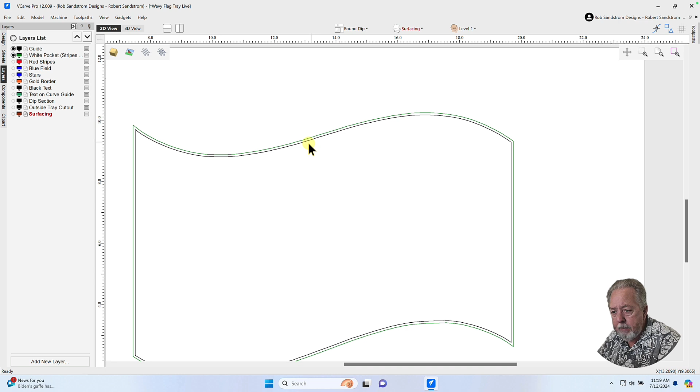And so the stars are white, and then I've got white stripes. So the first pour I'll do is this white. And one thing I'll point out is it's just slightly past the guide layer, about 0.05 inches past the guide layer. I'll show that in a minute. The next layer that I have on here is my red stripes. So I'm going to pour the white epoxy first, and you'll see that when I demonstrate the actual carving in the board and the pouring of the epoxy.

The next layer I'm going to pour after I've got the white hard is my red stripes. You can see those right in this area right here. Each of these are red stripes. I will point out right now a couple overlaps that are obvious. If we look in here, you can see that the red overlaps the guide into the white on the top, on the side it overlaps the guide, and on the bottom it overlaps the guide and goes into the white. And I'm not worried about going a little bit past the white because I'll have a gold border.

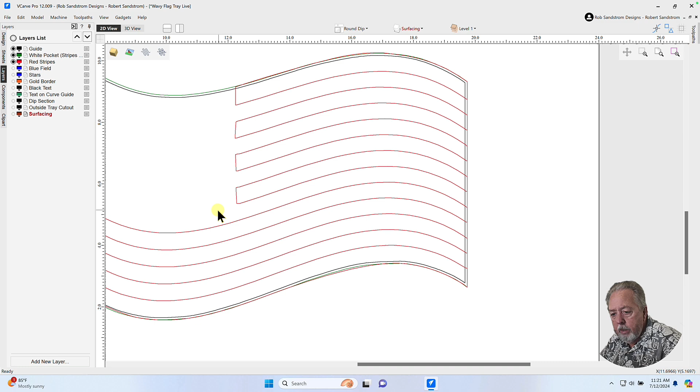You will also see when I put up the blue vectors that it overlaps the blue. And that is so that we have nice crisp lines, and I'll talk more about overlap in a little bit. So I'm looking at overlapping certain colors to allow us to have the exact sizes we want and the look of the design. So in this case, we've got our red stripes, and they're going to be carved directly into white. So as long as I make the red stripes exactly the size that I want them, the white stripes, which are already there by the time I've poured the red, will be exactly where I want them.

The next thing you'll see is the blue field, and that's where the white stars are going to go in. Now, to make sure that the white stars can appear, I actually need two vectors. I need this blue vector here, and I need these stars vectors. And what I'll be doing is a vCarve toolpath between the blue outer field and each of these stars. And because I've already poured the white, these stars will be left proud. And then I will pour in the blue epoxy.

And when I get done with that, I'll have the blue, the red, and the white all in the locations they need to be. And once again, you'll notice this blue, which is a third pour, overlaps the red stripes on this side and overlaps the white on this side, or the guide. And that becomes important for understanding how everything's going to lay out as we go down the process of pouring this project.

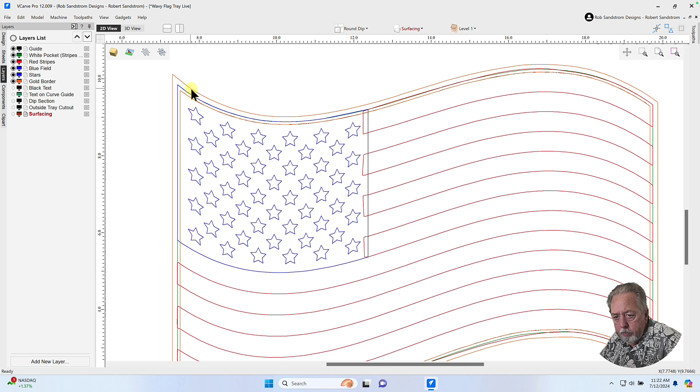The next set of layers that you'll see are the gold border. So if you look here at this gold portion, and you look at this area and this area, let me turn it off again so you can see what I'm talking about. See, the gold, once the blue is hard and the red is hard and the white is hard, you'll see this gold border goes way outside those vectors, and then it comes inside those vectors by about 0.05 or so. I think it's 0.05. We'll measure it in a little bit. And that allows us to make sure that we have a nice crisp line around the flag on the red and the blue here. And it will make sure that everything, when we get said and done, is exactly the size we want it to be.

The next vector you see is the black text. And I'm going to open up two layers here. One is the black text, and the other one is the text on the curve. To get the text on curve guide, I simply duplicated a red stripe vector, and then when I did the curve on the text, you can see I put that above the vector.

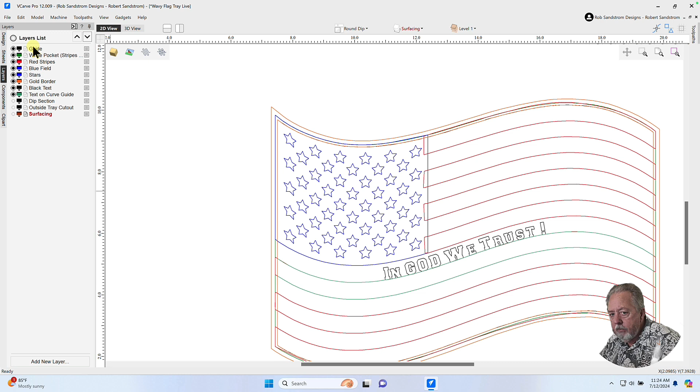Once I have all of the epoxy poured and hardened, then I will go ahead and use this surfacing toolpath. This one doesn't really matter here. That's an artifact. Let me get rid of that right now. And I will surface the epoxy off, and I'll talk about how I do that in a minute. And then once that's all surfaced off, I'll create a pocket toolpath and a roundover toolpath to clear out my dip area. So I've got a little pocket here for a dip. And I'll show you that as we go through it.

And then once I have the pocket and dip in, the next thing I want to do is cut the tray completely out. And once the tray is completely out, then I can go into the finishing process, and that will be after I do this software tool. So all of the physical work I'm going to do after the software. I'm just telling you how I'm setting the software up to cut the board and do this part of the project. So let me turn these vectors back off for a second. So now all the vectors are off.

Let me go through the process of bringing in the actual flag that I used, the vectors or the graphic that I used, and how I went about laying out the layers. I didn't keep that in this file, so I'll go back and grab that and bring it in. And you'll notice that I left this guide here to allow me to come in here and look at something for a second.

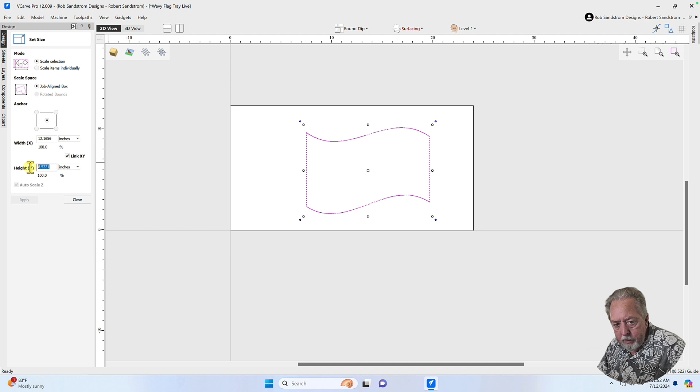I'm going to look at the size of that guide using the resize tool. So I'm going to make a note that the size of that axis is 8.5221. And I will go ahead and copy that, but I made the note in case I lose the copy, and I'm going to hit close. And so for that reason, I can go ahead and turn off this guide now so I don't create any confusion. We'll come back to the layer. Let me turn off the guide.

And the thing I want to do now is import, using the import a bitmap or vectors, the graphic that I used to start this whole project. I had gone to the internet and looked for royalty-free and free wavy flags, and this is one that I picked out to use for my project, and you can see what it is right here.

And I'm going to group this for a second by hitting G, or you could have hit group over here. And I'm going now to center that, and I can do that by hitting the F9 key, function F9, or I could do it by coming over here and clicking here. Now I've centered that in the middle of my project.

If you recall, I wanted my flag to be the width, and we're going to go back over here to the resize tool, and I'd copied it. Let's see if it stayed. Control V, I copied and then I just pasted in what my actual design was that I had decided on before. I copied that in there, left the link XY in place, and now I apply it.

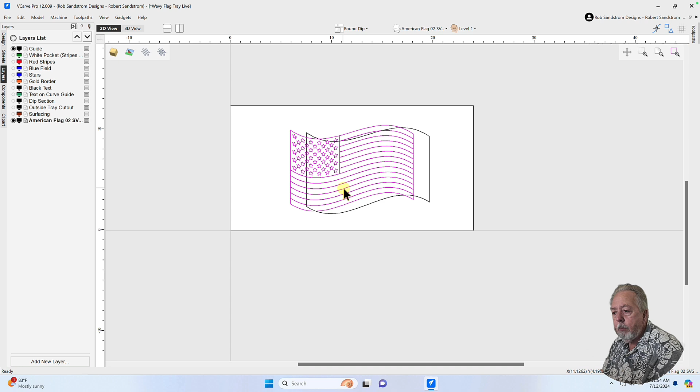So I click on the grouped vectors, hit shift and select the other one that I want to use, go back to design, and then I am going to center that object inside the last vector that I selected. And now you can see it lines up perfectly with the guide. And I'm going to go ahead and take the guide now and turn that off so that I don't create confusion as I start to lay out the vectors.

So now we have those vectors from the American flag graphic that I imported that was a free, royalty-free graphic, and it's sitting in my project. And you can see that it is in its own layer. And if I ungroup it by hitting U, or ungroup back onto original layer, all of those were on the American flag graphic layer. So I'll turn that off and you see they're all gone. So right now there is no conflict with any of the other layers that I created.

So now we're going to go through the process, and this can take a while, of setting up the layers. So the next step is to set up the vectors. And when we set up the vectors, the key thing we have to remember is to make sure that we have the correct amount of overlap so that when we mill the epoxy flag down, we don't have any wood or other artifacts exposed. We want nice crisp lines.

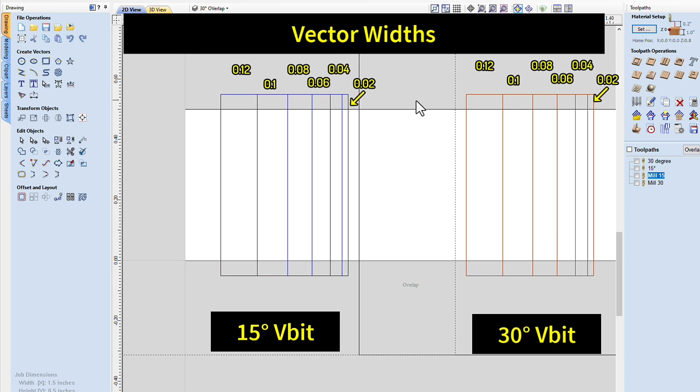And the goal is to show what happens when you use a vCarve toolpath with each of these vectors with no overlap. So I'm going to demonstrate in this little preview what happens when you cut these vectors with no overlap using a 15-degree V-bit and a 30-degree V-bit in the attempt to try and show you why overlap is important. So I've set up, if you look over there on the right, a couple toolpaths, a 30-degree V-bit toolpath, a 15-degree vCarve toolpath, and I've set up a milling toolpath for later when I want to surface this.

And so I'm demoing in this block. If I run the toolpath for the 30-degree and 15-degree bits, what does that look like? And as you can see by this mimic, when you look at the sides there, you see how far it's going down, and the reason they're flat is because we put a 0.125 depth, and we've got a 15-degree V-bit and a 30-degree V-bit, and look at the mountain peaks that are underneath each of those, and you can tell that that is the wood or the underlying material.

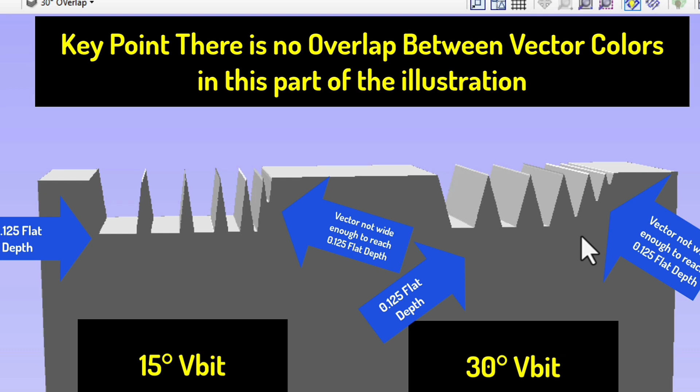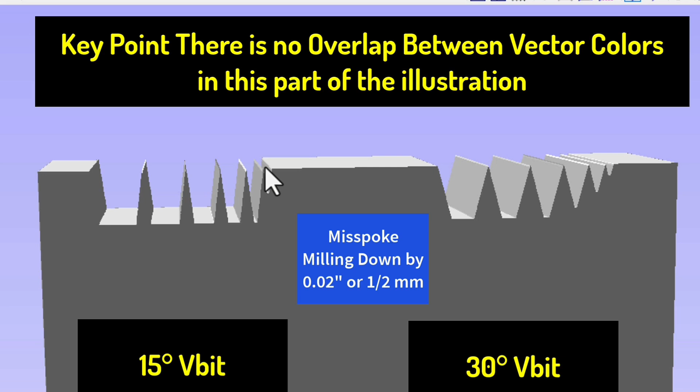So the V-bit cuts with a peak right at the very top of where those two vectors joined because there was no overlap. It is also demonstrating how deep it would go if it doesn't reach the flat depth. So we're going to assume this base material in the mountain peaks is wood for this discussion. And then I'm going to want to demonstrate that when I mill this down by 0.02 inches, not very much, which is a half a mil, what happens to those peaks and how they get exposed so that you don't have crisp lines between the colors of the epoxies you're pouring.

Assume that each of these vCarve toolpaths have a different color of epoxy so that they're supposed to be married right to each other, and look what happens when you mill that down with no overlap. I want you to watch the top. I'm first going to mill down the 30-degree side of the bits, and then I'm going to mill down the 15-degree side of the bits, and then we're going to compare what we see between the colors of epoxy. And I hope this demonstration will make it clear to you why we need to use some amount of overlap. Remember, this has no overlap at this time.

So I need to turn this over to the side here so you can get a better look. But you can see the flat tops, the flat peaks right there on the top that my cursor is pointing to. That's what I'm trying to show you, is that as I milled it down, we exposed the wood mountain peaks underneath, which then does not result in a nice, clean looking picture or epoxy inlay. You can see that it was a little less drastic on the 15-degree, and if I turn this, you have wood peeking through here on the top of the 30-degree, and a little bit of wood peeking through on the 15-degree also, and that will take away from the look of your vCarve.

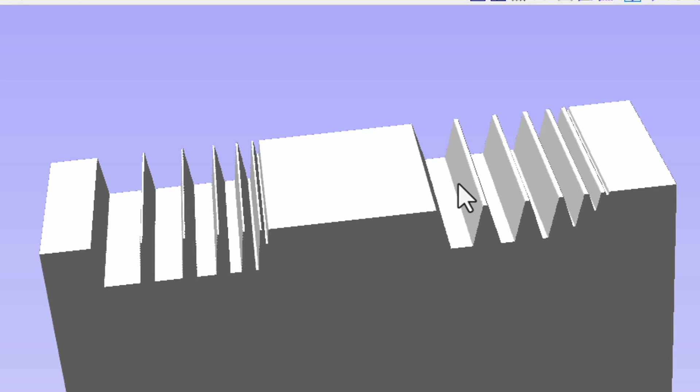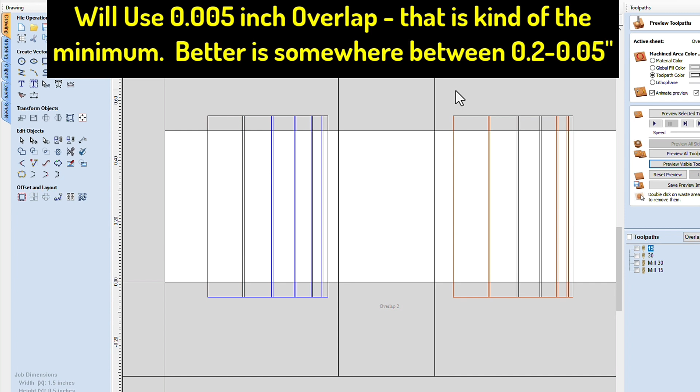So what we need to do is make it so that when we mill this material down, you don't have that wood or underlying material peeking through. And that's what we use overlaps for. So I'm going to set this same project up, but this time I'm going to use a small overlap of 0.005 inches. Normally, Shane recommends somewhere between 0.2 and 0.05. 0.05 is pretty heavy for smaller vectors, but it assumes that you have the best chance of not uncovering some kind of underlying material. So what you see here are the vectors set up in the same sizes, but now we've got an overlap, like I said, of 0.005.

And let's watch what happens when we carve these same vectors with those same V-bit toolpaths we did before. 15-degree on the left, 30-degree on the right. All right, we've got them set up to run. And now we're running those bits. And to get a good picture, I'm going to have to turn this over at a different angle because it's not real obvious what you're looking at.

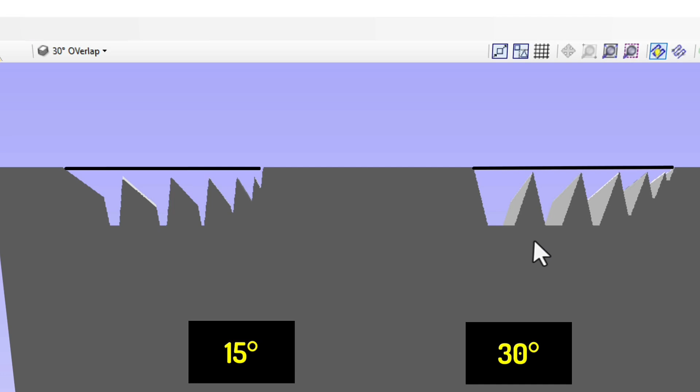But I think you can see that the peaks are below the top of the wood now. So the colors with the vCarve are actually overlapping each other, and whichever color had the last V-bit run on it will be the color that's most predominant on top. But as you start to mill it down, they will come down evenly, and you will have no wood in between.

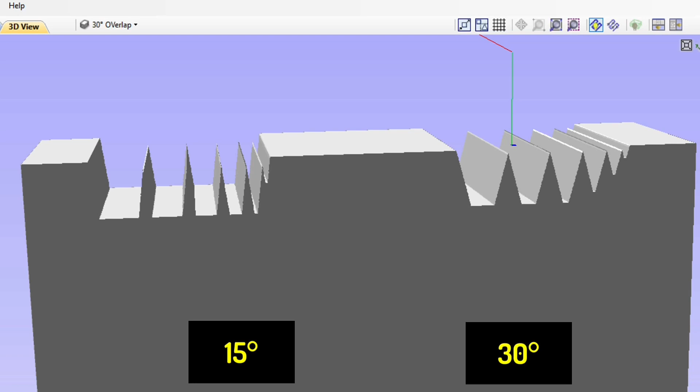You'll have a nice crisp line between the two colors that you poured. And I wished I could show the colors in there so that it would be easier, but I don't have a way to do that. I'm showing there that the wooden peaks are not likely to show through, and now we're going to mill it like we did before. First we'll do the 30-degree bit, and then we'll do the 15-degree bit, and we're going down 0.02 inches once again, which again is a half a millimeter.

Now we're doing the 15-degree, and if we take a look at this, you will see on the 15-degree there is no wood on the top that you can see. The way the V-bit worked, it left no wood. And on the 30-degree, there is a small line. So a 0.005 overlap probably isn't sufficient to ensure that you don't have wood or some underlying color peeking through. And that's why Shane has a bigger minimum overlap to make sure you have nice, crisp interfaces.

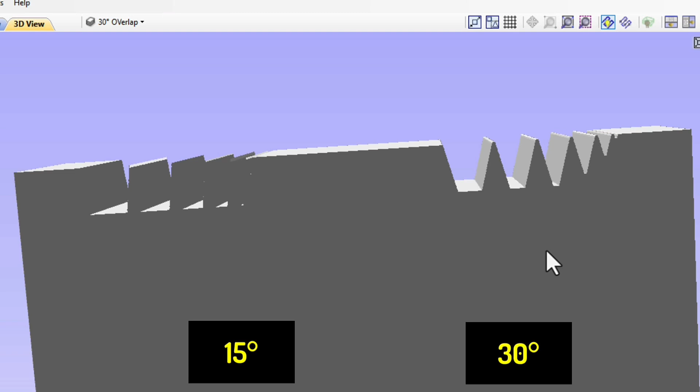I hope this makes it clear why we have overlap. And as you can see, the smaller the bit, less chance of needed overlap. We just finished the video on overlap fundamentals. I hope that gave you a good foundation of why overlap is important, and also why Shane generally recommends, which of course I recommend because he's my mentor, an overlap of about 0.05 if possible. That really removes all doubt with most vectors of having the wood or the underlying colored epoxy peek through as you start to mill your material.

The vector overlap I used in the video just to be able to demonstrate what I'm talking about with a 15-degree and 30-degree V-bit was of course 0.005. And you could see that that wasn't nearly enough for a 30-degree V-bit and may have just barely covered a 15-degree V-bit. We're going to use an overlap typically of around 0.02 to 0.05, and that's what you'll see in the rest of this video. I'm trying to shoot for about 0.05.

There might be some cases where I go down to 0.03, and because I'm making a white pocket pour, that overlap isn't as critical, say, between the red and the white stripes, but it does get critical between the blue field and the red and the gold border that I'm going to put on as we go through the rest of the video. So in the rest of the video, we're going to go into significant detail, and I'm going to show you vector by vector how I lay that out and get the proper overlap.

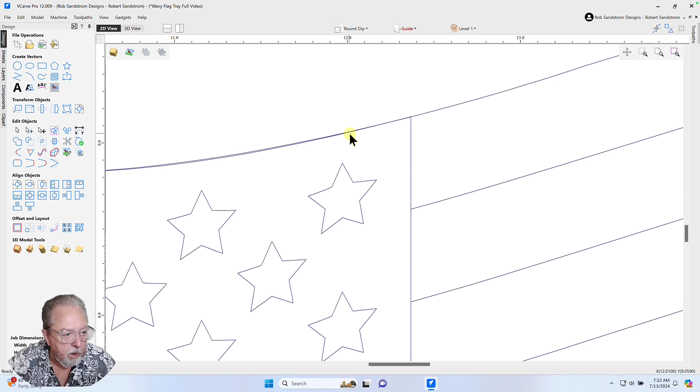So let's start out with the first set of vectors, which I will call the guide, you might recall. So I'm going to come in here, and this one's tricky because we have red stripes and we have white stripes. And so I want to grab the vector that is going around the entire flag and turn that into the guide.

And I think you can see that right here. If you look, this dotted line here goes all the way around the flag. So that is going to be our guide. And so I'm going to know I got all of the various elements of this flag by moving them to the appropriate positions in our layer tree.

And so that I don't mess up my original ones, you're going to see me develop these guides or these layers as demo down below. And then I'll compare the demo ones to what I actually used to cut the project. The first layer that I want to create, I want to add a new layer, and I'm going to call that the guide demo. And that's the way I created this guide layer up here.

So now that I've got the outer layer selected, I'm going to move that layer down to this guide demo layer so that I can keep track of what I've already done. And I'm going to make sure that I turn that off, and you can see that part of the flag moved. And I know that I want the white pocket to be slightly outside of the red stripes. And I'm going to go ahead and use a 0.05 offset for that.

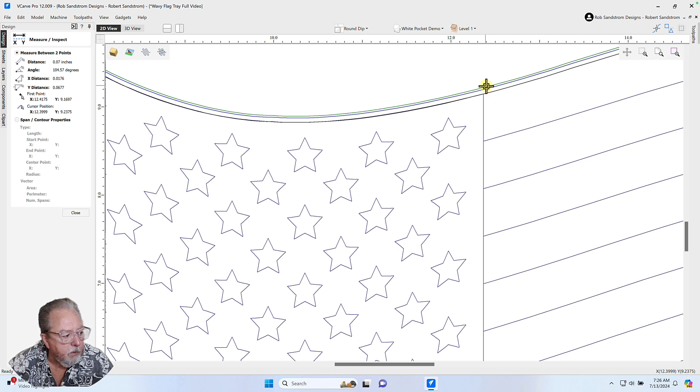Let's see what it says. So originally, it looks like I might have offset that 0.07. And that happens as you go through the design, you start to adjust what you want. And so I think I will go ahead and readjust that. I'll hit Command Z.

And now I'm going to go back over to the layers. I'm going to make sure that's selected. I'm going to go to Design, and I'm going to offset that 0.07 like I did previously. Hit Enter. And now I've taken that, adjusted to 0.07, close, and you can see that the green and blue layer, or the white pocket layers, are right on top of each other. Let me turn off the official white pocket layer that I had from before.

And now we've got our white pocket layer, and we have got our guide, and we've got the rest of the American flag. So the next step on this process is then to move over the red stripes, because you see I have that up here. So we're going to grab the red stripes now. We're going to move those to a new layer. I'm going to add a new layer here called Red Stripes Demo.

And I'm going to make that the active layer. And I'm going to go through here, and I'm going to try to collect the red stripes. And that can be a little tricky. So I'm going to zoom in here. You see I've got that stripe there. And then I'm going to come down here. I'm going to hold the Shift key. I'm going to grab the next stripe.

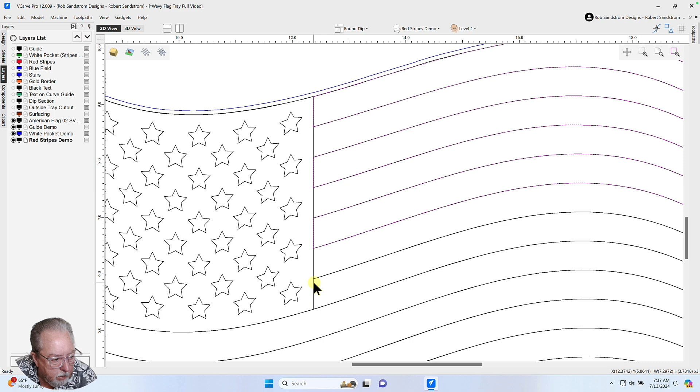So that's red, red. This will be red. This bottom one is red. Skip one. This will be white. This will be red. I grabbed the wrong vector there. So let's see if we can get it. I'm going to move these other ones right now before I lose them. So I'm going to move those to the layer called Red Stripes Demo.

And I'm going to turn that a different color. And when I'm doing it officially, I would turn it red, as you can see up on top here, but I'm going to turn it this color right here, this dark green, so that I know that I already moved those. Okay, and now I'm going to come over here to the next red. Let's go down here and see if I can work my way up.

That's actually the guide. Let me turn off the guide demo. So that's part of what's causing me my trouble. So now let's go to here to red. All right, now it's going to be easier. Hit shift over here and hit shift over here, and that should be the rest of the reds. And I'm going to move those. I right click that, move to layer, Red Stripes Demo. And now they should all be on the Red Stripes Demo.

So what I'm going to do is I'm going to turn off the other layers and the flag. And you can see there's our red stripes. Remember how many we should have? 7. 1, 2, 3, 4, 5, 6, 7. So we've got our red stripes separated out.

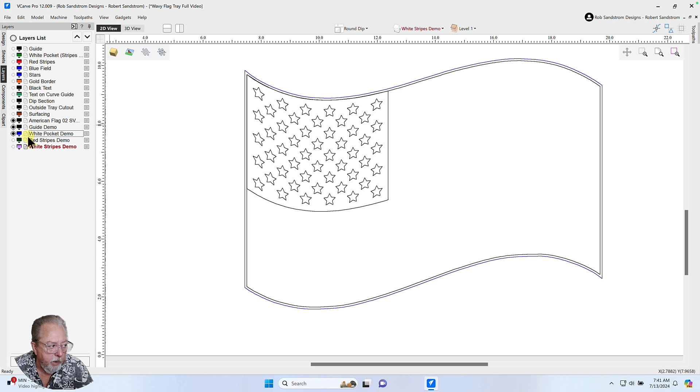I have a white pocket demo because I already decided instead of doing each stripe individually, I'm going to do a pocket first and then carve into that with the red. And I've got the red stripes that I'm going to have to modify with proper overlap. And then I have the white stripes, which I'm not even going to show because I'm not going to use those in the overlap or the process. So let me turn those all off.

And the next step I need to do is I need to set up my blue field because that is going to require some overlap. So I need to have that on a separate layer. So I'm going to grab this field and I'm going to move this to a new layer, and I'm going to call that Blue Field Demo.

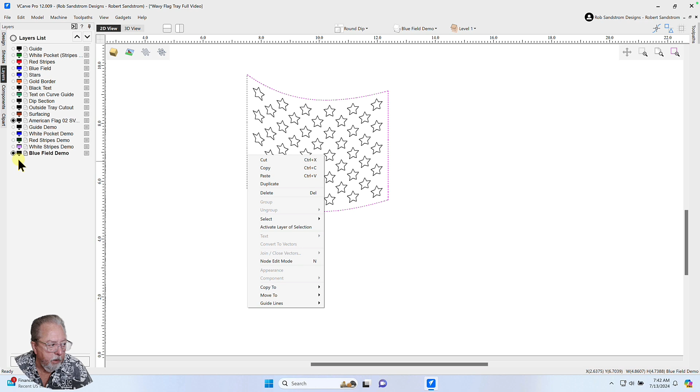Hit OK. And over here I'm going to make that red because I know I didn't use that color for blue. Now you're asking why I make these different colors. Hopefully I explained it well enough. I don't want it to conflict with my final version, because what I'm going to do is as I do these overlaps, I'm going to go back and check against what my original overlap was and how I did.

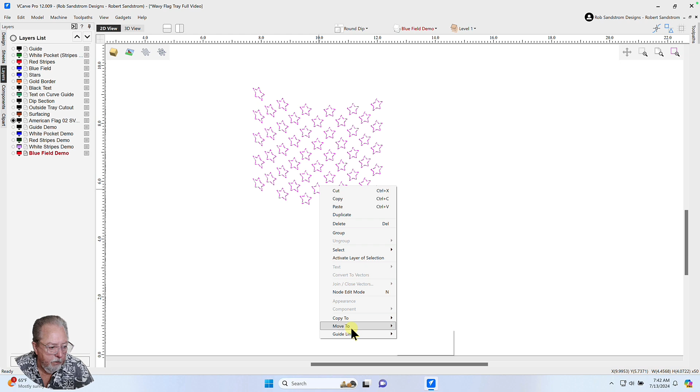So now I have the blue field. The last thing I want to do is take these stars and put them on their own layer, and this will work out when I'm trying to carve the pocket for blue with the vCarve toolpath. We'll demonstrate that later. So I'm going to move these to a new layer, and I'm going to put stars demo, and I'm going to make that color similar to what I did with the blue field demo. I'll make it red. Hit OK.

So now I have all of my, turn that off. I should have all of my American flag, and you can see it's empty, on my various layers. So now I've moved everything there, and I know that my American flag graphic is covered. So the next step is, let's turn these all on for a second. If I look at it, you can see that's how the flag is laid out in layers. And remember, I do my work by color layers. The first one was white. We're going to pour the pocket in there, and I know I repeat myself sometimes, but I'm trying to bring things around and make it clear in my teaching style.

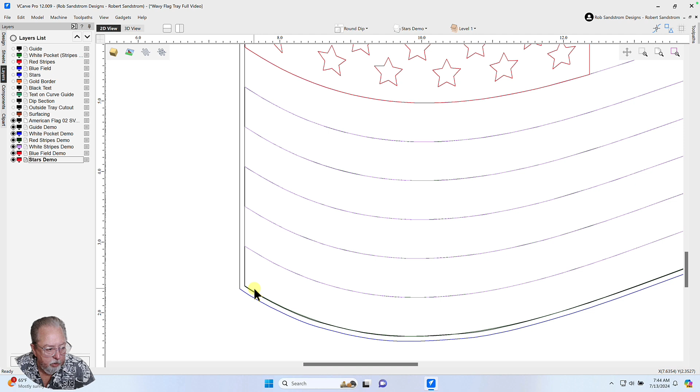The next thing I need to do is either do the red or the blue, however I want. But before I do that, I'm going to do gold. I'm going to have a gold border, and that gold border is going to go around the outside of the white, so it takes care of the white, and it's going to come inside to the guide area or so to make sure that I overlap the red that's going to be poured. And I'm going to bring the red top and the red bottom all the way up past the guide so that we have a nice border around it. It'll become clear as we go about doing that.

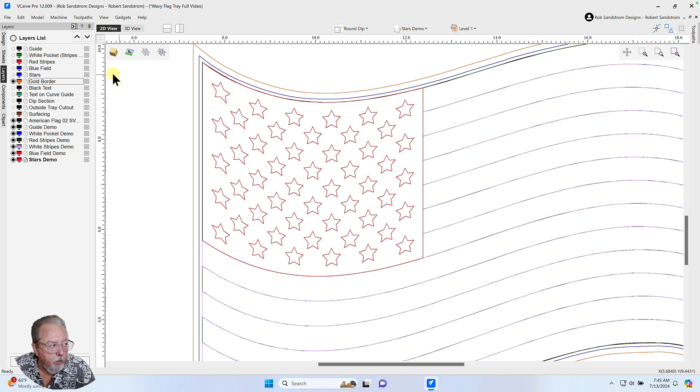In fact, let me show you where the gold border is right now as I already designed it. So let me turn on the gold border real quick. And I think you can see that the gold border comes up. And if we look at the distance, let's take a distance, and I go from the guide that we already have, you can see that the gold border is about 0.25 inches from the guide. And if you look at it from the white that we established, it's about 0.1299. So it's a big overlap, and that's okay, because in the end, what we want is a nice gold border that's about 1/4 inch or so thick around the whole flag.

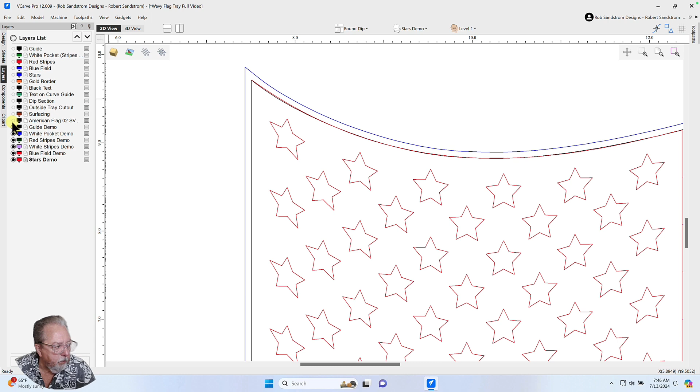Again, I'll show you that. Let's go over here where it might be a little easier, come across, and you can see the border is 0.2038 inches wide, and that's how big it'll be when we carve it. That allows us to have it plenty wide enough to get an 1/8 inch clearance bit in there. So let me turn off the gold border again, and let me come over to the layers. I'm going to turn off the gold border, and I'm going to turn off the American flag. I'm going to leave the guide demo on.

And now we're going to set up our gold border. So on our gold border, let's see here. I think I wanted this to be about 0.25, 0.20. It doesn't matter if I match it exactly from my original design, but here's what I'm going to do. I'm going to make a new layer, and I'm going to call it Gold Border Demo.

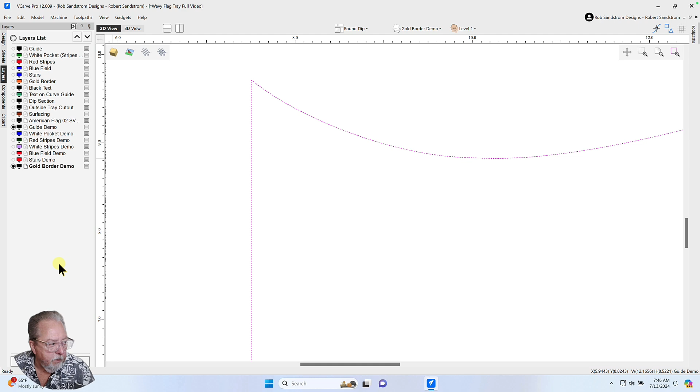Okay, first thing I'm going to do is offset that out 0.2 inches, I think. So I'm going to come down here, offset, outwards, 0.2, roughly. Create sharp corners because we have the sharp corners there. Hit offset, and now that's my new gold border. Let me validate that I had that on the active layer, gold border demo.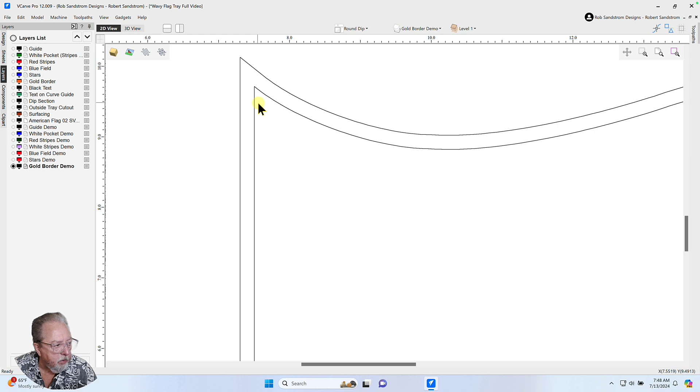Let me turn on the other gold border, and you can see it rides right over the top of that. Turn that off. And then the other thing I need to do is close this. I need to take the demo piece, and I need to copy, not move, copy that to gold border demo. And we come back down here to layers, and I'll turn off the guide, and you can see this is the gold border. Let's turn the gold border this rust color, and let's lay the final gold border on that to make sure I set that up like I did before. There you see it rides right on top.

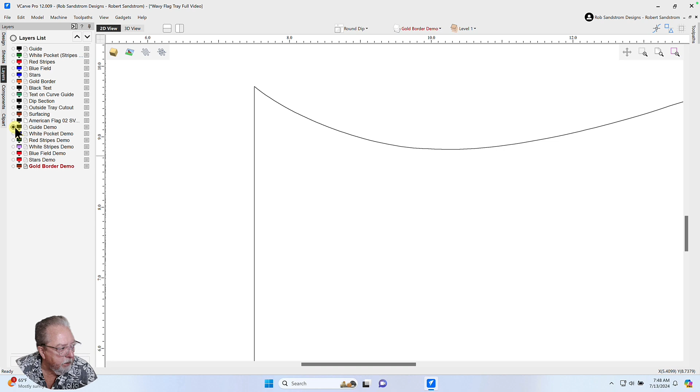So now what we have is our gold border around there. So we turn on the key pieces. Let's turn on the guide. Let's turn on the white. And let's turn on the gold. What you can see is the gold border is going to bound the white. So anything within the gold border, that's going to be the last cut we do. And it's going to come through and clear out any overlaps that we have.

So the next step is to overlap the various areas that we want to overlap. So let's go ahead and start with the blue field. How about we start there? So there's the blue field. And we know that we're going to need this field to overlap into above this guide, which is where the gold's going to cut. So we need it to go above the gold border here and no higher than the white, but the white really isn't that important. Just as long as it goes sufficiently high above the gold border, we'll be okay.

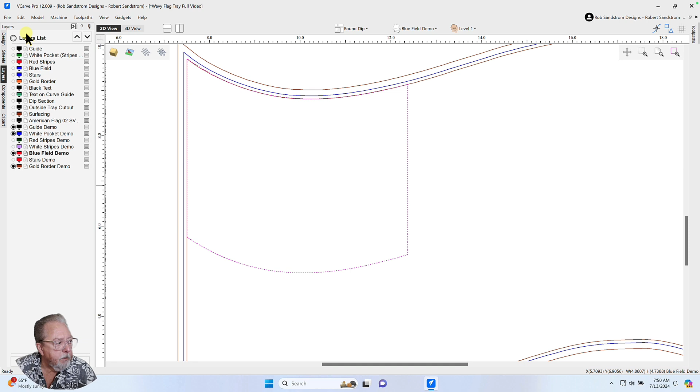We also know, to keep the flag proportions correct, that we need to keep this right edge and this bottom edge the same. So the only areas we need to move are those that are going into the border. So that's our next step, we're going to go ahead and move that. And to do that, I'm going to make sure that I've got the blue field demo located correctly. So that's my default. And then I'm going to go to the design. I'm going to hit N for node mode.

And this is where things start to get a little tricky, because you're pulling these nodes. And our goal is we're going to pull this side of the flag out so that it's to the white area, I'll call it, to the white border, right close to it. It can be a little shy, a little out, it doesn't matter, but we want it that far to get the nice overlap with the gold border inside.

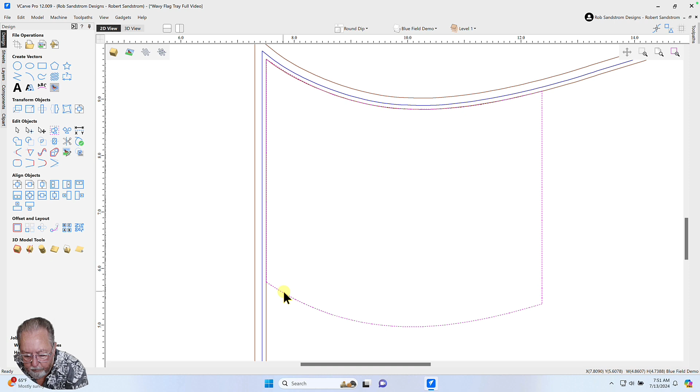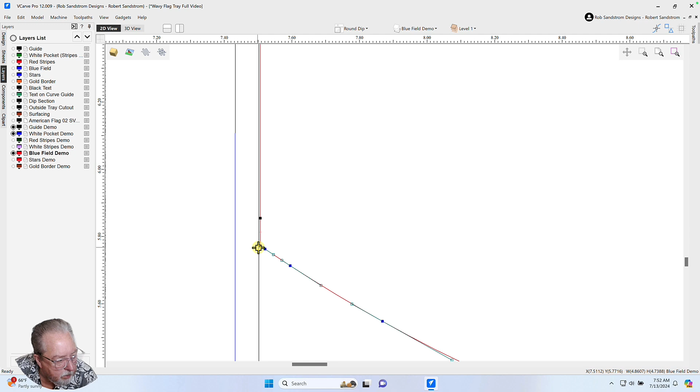And I'm going to turn off the gold border, because it will want to get in the way sometimes, and we don't need it, because we know we just need to go out to the white. So now I'm going to go ahead and hit delete there. And so I'm just going through right now and taking out the ones that I know may create issues for me. So D there, D there. I'm going to insert one. I'm going to insert a vector, say right here, since I probably shouldn't have deleted the other one. And you ask me why? Well, because this is going to be my anchor. I don't want this to move, because this has the shape of the stripe below it.

So now what I'm going to do is I'm going to take this vector and I'm going to move it out just close to the white. If it's on the white, that's fine. At the white, that's okay too. Just shy of the white, that's okay too. Either one will work. Now I'm going to go up to this other vector, and I want this vector to be up in the corner.

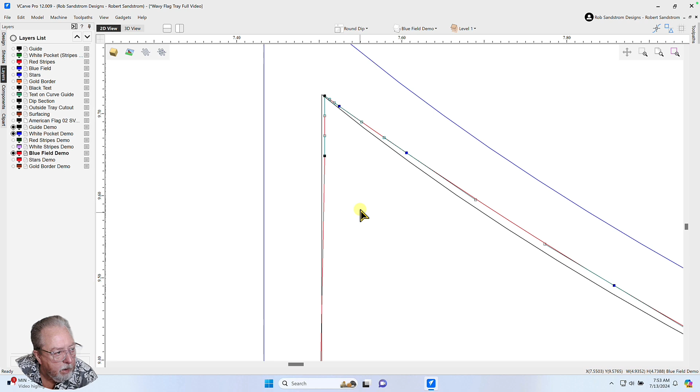So I'm going to make sure I'm grabbing the right one. Yep, I'm grabbing the right one. This is the guide, this is the vector. I'm going to pull this way up here. And I'm going to take this one here, and I'm going to pull this up here. See, I'm just shy of the white, right at the white.

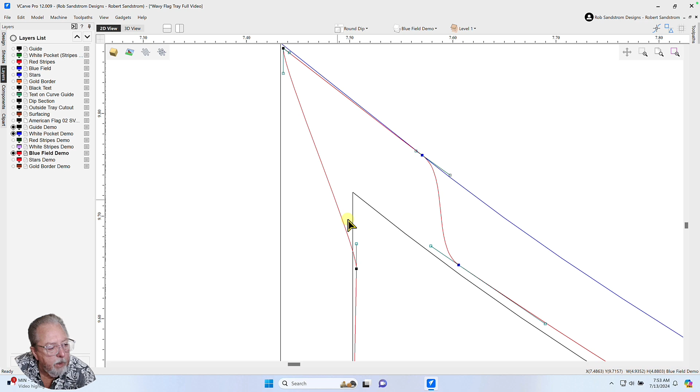And then I can come over here now, and this is extra. I can delete that one, and you can see that gives me a nice straight line down there. And then what I want to do is come over to this other corner. So I'm going to go to each corner first.

And on this corner, I want to make sure this is anchored, because I don't want this to move, because this is the regulation size of the flag for the vector. So I want to take this one next to it, and I want it to move, and I want to make sure from this point down, everything is nice and straight.

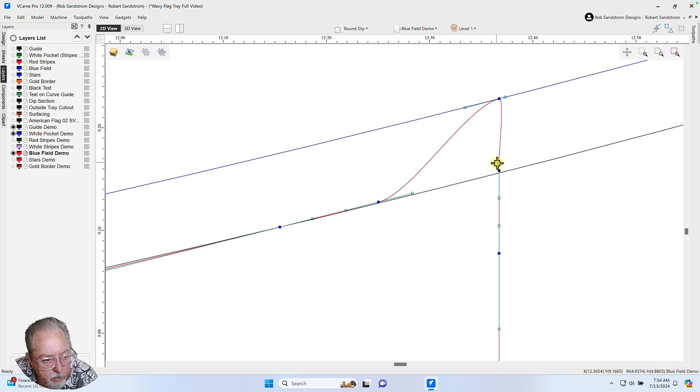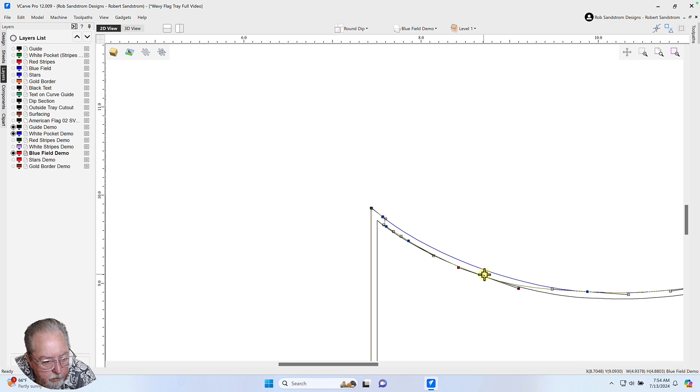So now I can take some of these vectors in the middle and move these up. I'm going to move this one to here, this one to here. These two I'm going to go ahead and just delete. And I'm going to move this one here, and I'm going to move this one here, and I'm going to delete this one.

After deleting that last vector, let's go in here and see what we got. Hit node again. So that's my blue. Let me turn off my guide and my white pocket and just look at my blue. That looks good. Let's turn on the white pocket. And you can see it comes right along the white pocket. So I like the way that works. And we never changed the right side or the left side.

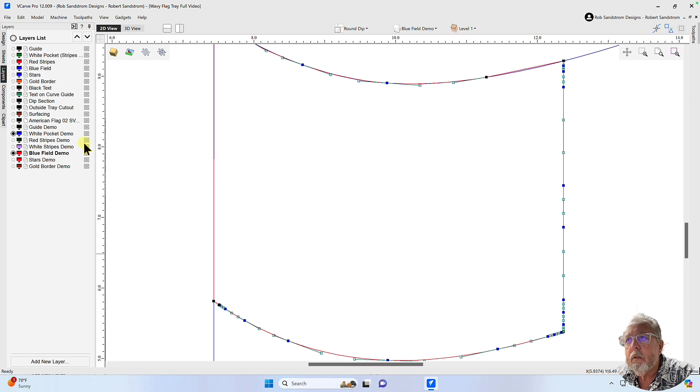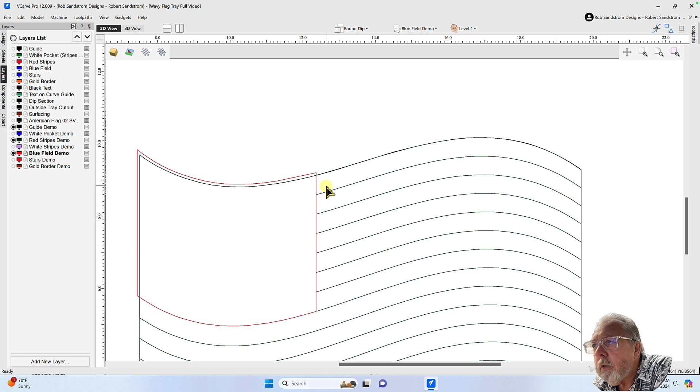So now the next step, let me turn the guide back on for just a second, is to switch over to the red stripes. So when I turn on the red stripes, let me turn off the white pocket right now. What you can see when we're looking at the red stripes is we want each of these red stripes to stay the same width. If we're measuring the distance on a red stripe from there to there, we don't want that to change.

Since we are engraving into the white, we know they won't change anywhere where we're engraving into the white. But where we need to go out into the gold border up here, and on the left side and the right side, those stripes are going to need to go past the guideline and towards the white. Let's turn on the white. So they have to go out to the white area past the guide, because when you turn on the gold, the red stops at the gold, so there'll be overlap issues.

So you want to take these red stripes and move them into the area of the gold, and you want to take these red stripes and move them into the area of the blue field. So on the right side and left side, each of the stripes need to move. On the bottom, they need to move down, nothing in the middle, and then on the top, it needs to move up. And that's what you're going to see me doing now.

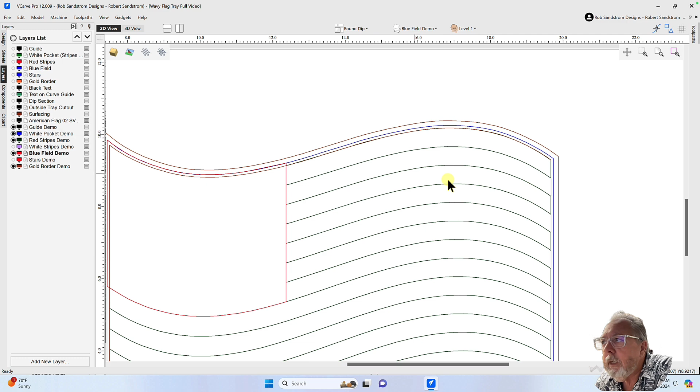Again, it's a long process, node by node, but as I pull the red stripe up in the top, I'm watching it as it comes up. And I can't just do a rampant pull, because of the curved angle. If this was straight, not a wavy flag, I could just grab all of these and move them out.

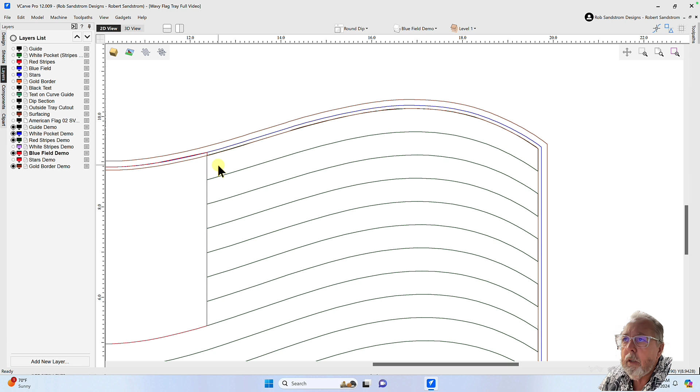But I can't do that because I've got to maintain this angle right here, or the stripe won't look right. So I have to maintain these angles here and on the edges wherever they're going to be cut off. Hopefully that'll become clear as we go through the node editing process.

So let's start now. I don't need the guide, because I can use the white as the thing to look at. I don't need the gold, because I know that if I'm up towards the white, I'm not in the gold. All I need is, for the first set, I'll go ahead and do along the blue field. So I'll leave the blue field up for now.

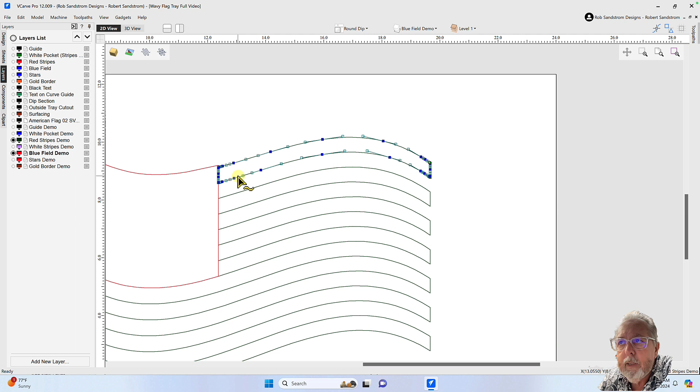And I don't need the white pocket right now for the field, for the red stripes going into the field. And I'm going to do it this way right now so that I have as few vectors as possible that I can interact with. And so we're going to go to the node mode. I'm going to grab this red vector. I'm going to go to the node mode by hitting N, or I can actually, well, let me put the stars up too, because I want to watch how far I'm moving them in.

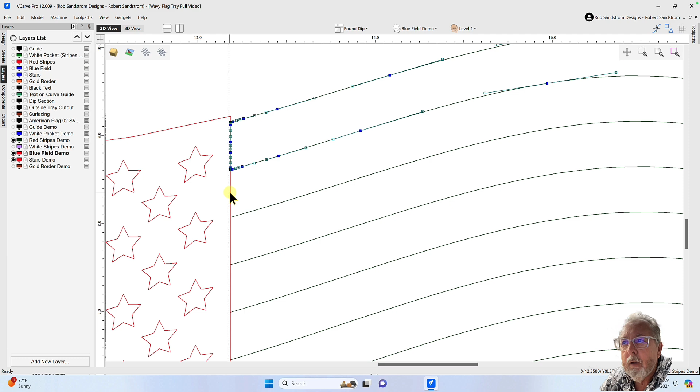And for me, I can do this a number of different ways, but I know if I go in here at least 0.05 to 0.03, somewhere in that area, I'm going to be okay. And since it's just straight up and down, I'm going to use another guide. I'm going to come out here, line this guide up right on that blue union. Remember, that's the blue union right there.

I'm going to create a relative guide, relative, and I'm going to come in negative 0.05. And I know that gives me plenty of room, and I don't have to come in that far, but at least I know that'll give me a guide. So I'm going to create a new guide. I'm going to get rid of this guide right here. And so I know if I come in at least that far, I'm in good shape. So that's what I'm going to do. I'm going to come in that far, and I'm going to start moving these.

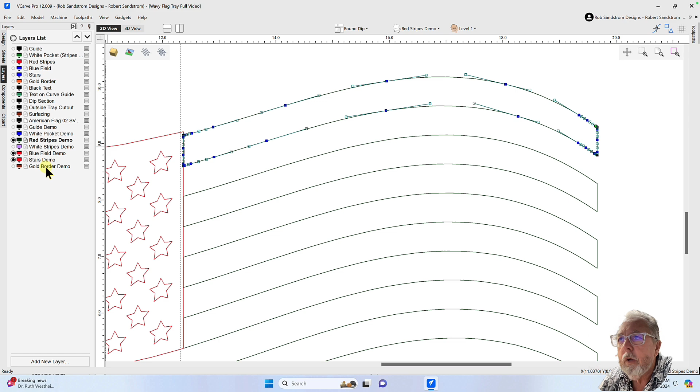So we're going to hit N for node mode, or you could select it with the effector. And I want to make sure, this is where we can get messed up, I'm not in the blue field demo. I want to make sure that my active layer is the red stripes, because I want them to stay on the red stripes when I move everything. All right. So I'm going to work just around the blue union at this time. I'm going to use these corners as anchors.

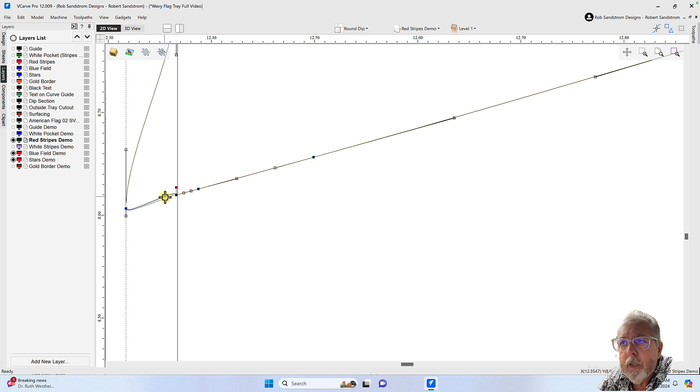So I'm going to take this node right here, and I'm going to pull it out over into this area. That's 0.05, and I know that will be fine. And I'm going to take this other Bezier curve node, and I want to make sure that that is as straight as possible right here as it goes over. So I've got that coming in, and I want to maintain that shape. So I'm going to move it up just a little more. It's all by eye. Make sure it's nice and straight coming in. And I'm going to move this up a little bit. All right, that looks pretty good. This, I'll go ahead and bring that way in.

Now I'll go up to the other corner. Remember, I told you I work with the corners first. I'm going to take this one right here. I'm going to move it out. Move this Bezier here. Move this one down a little bit now. Turn the Bezier over there a little bit. Turn the Bezier there. And now that's got a nice, good, straight ramp.

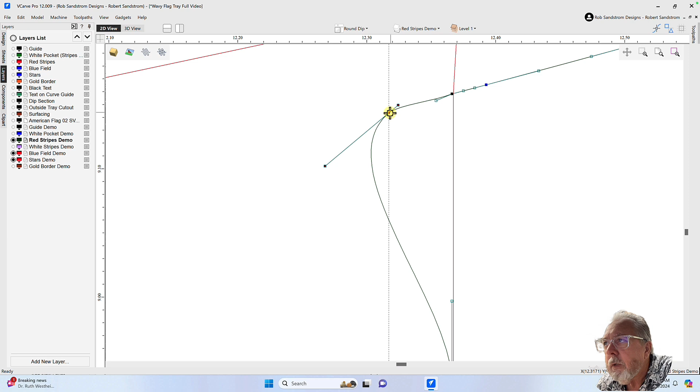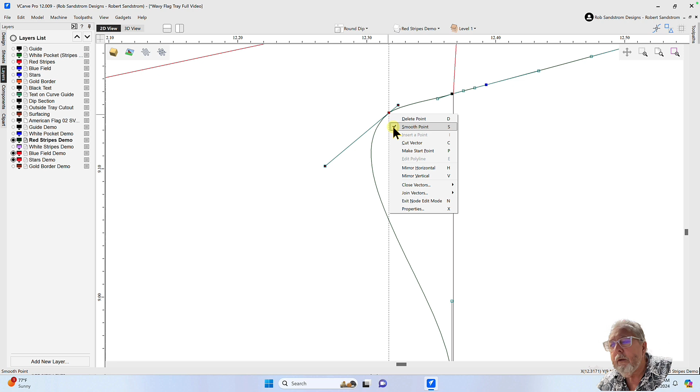Now, if I had my druthers, normally I should be able to click this off, and that should become just not a smooth node, but for some reason that's not working for me on my Mac. I don't know if it's a bug with version 12 or if it's a problem with my Mac. Most times you should be able to just click on this, right click it, and if you unclick the smooth, it should become a regular point. It's not working that way for me, but you can try that if you like. I'm just going to move on because I'm going to deal with what I got for right now.

So we're in the node mode, and the next thing I'm going to do is take this node and delete it. I'm going to take this node and delete it. And now you can see it just goes straight down. So we've got one of our red stripes done. And now I'm going to do each one the same way, and I'll go ahead and speed this up. But you've got the idea. I'm leaving an anchor node, moving it out. Then I'm deleting inside. So let me go ahead and do that, but I'm going to speed this up when I actually show this in the video.

So now you can see that I've got all of the stripes that are going to overlap with the blue union overlapped on the left side. And I'm going to turn off the blue field now. The next step is take all these stripes and bring them over the edge into the gold border. So let me turn on what I'm talking about here.

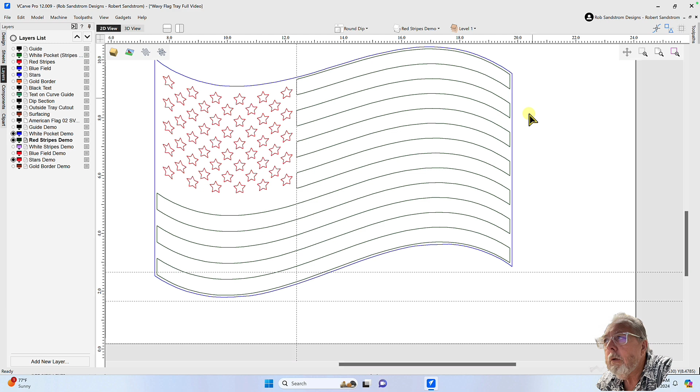I'm going to turn on the guide or the white pocket, either one, and I'm going to pull them out towards that white pocket. And if I get out there, then I know I have plenty of room when I turn on the gold border. As you can see, the gold border will be where these are stopping right now. So now we're going to go through that.

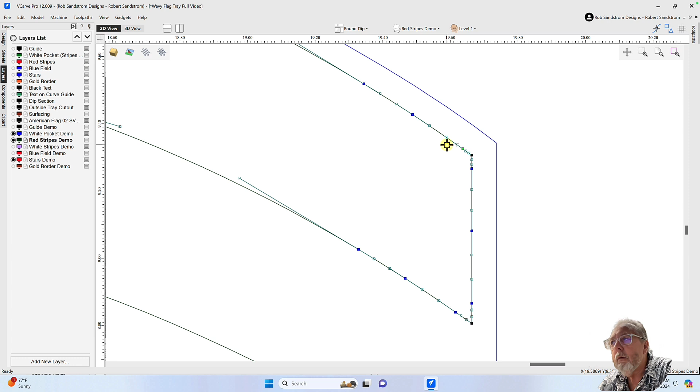And once again, I'm going to use the corners always as an anchor point. I'll demo the first one. So I've turned on the nodes. I leave this as the anchor point because that's where the gold is going to come down, and that's where you're going to see the interface between the gold and the red stripe. And I'm going to pull this one out. Going to make sure that that angle stays pretty good.

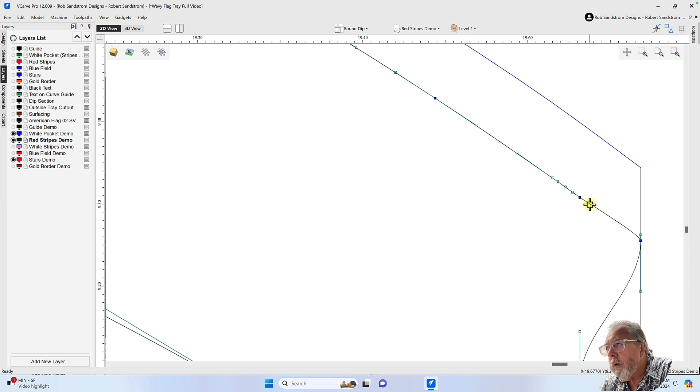And when you're doing yours on your Windows computer, if it allows you to turn this one into a non-smooth mode, that would be even better. But for some reason on my Mac, when I try to turn it off, it doesn't work. So now we're going here. Remember, I'm not grabbing. This is my anchor point. This is the one that stays on the guide.

And I turned off the guide because I don't want to accidentally mess with those nodes. So I bring that down here. Keep that angle pretty good. This is good. You won't see this because the gold is going to go inside here. Then I'm going to go around and delete that one. And so that's what you're going to see me do now.

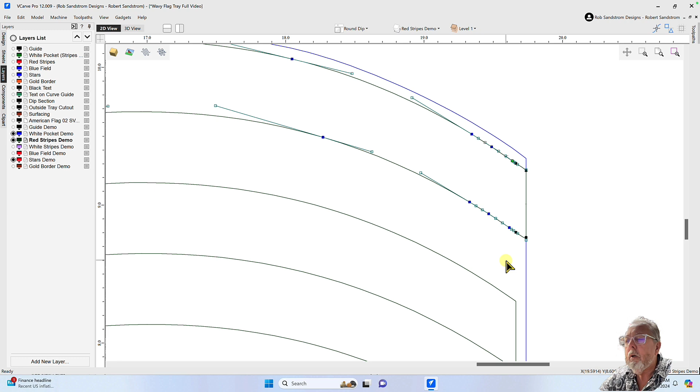I'm going to speed up the screen, but I'm going to go through the process of moving all of these vectors so you can see how I'm doing it, but it will be sped up considerably. So here we go.

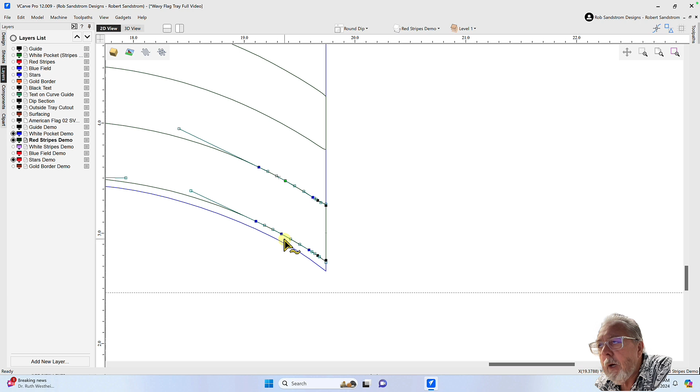So now, because this is a bottom stripe, I need to also come down into the bottom here, and I'll have to come back up and fix the top up here and do the same thing. But I'm going to show you right now how I'm moving the bottom down, and it's the same thing I did with the blue field, because the gold's going to come over the edge, but I'm not going to move the rest of any of these other stripes. And I just want to demonstrate that now.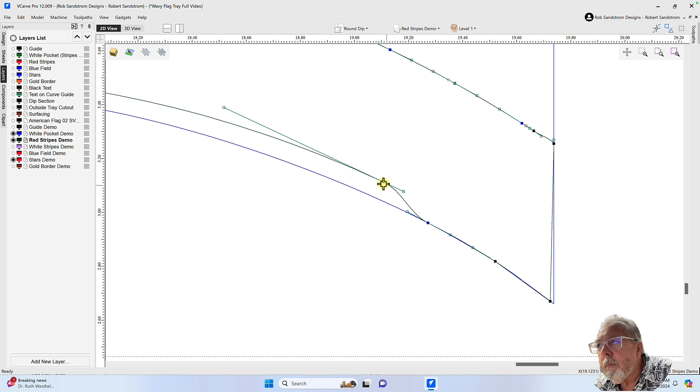And so I'm going to take this one here, and I'm going to move it down into this corner, and I'm going to delete this one. I'm going to move this down. This down. Again, I'm not trying to get right on the white. If I'm a little shy of the white, that's okay. It's not that critical.

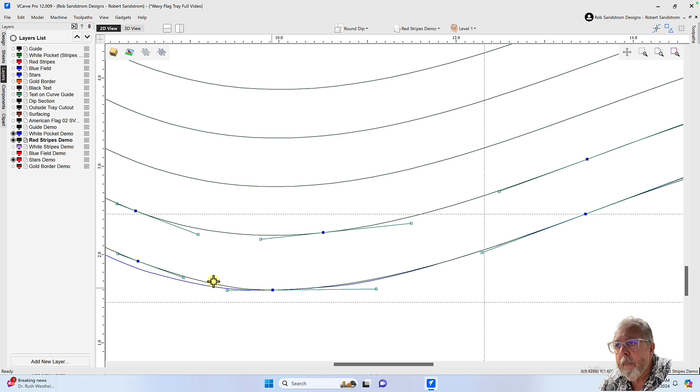I keep accidentally grabbing the handle versus the node. So let's get the node. There we go. Delete that node.

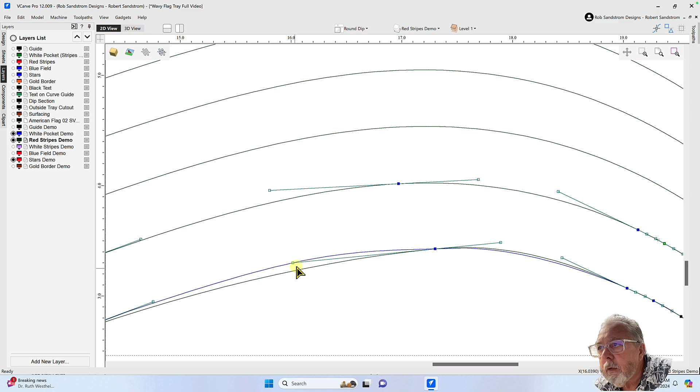All right, so let me take a quick look down here at the bottom. I just got to be close. It doesn't have to be perfect. As I said, as long as I'm somewhat within the white area there. All right, that looks good. And now we do the same thing on this side. Put up the anchors.

All right, now we've gone through and adjusted the bottom and the right. Let's take a quick look at where the gold is. So the gold, as you can see, bounds those areas. So now we need to finish up the left side and the top. So we need to finish the top of this red stripe and the left sides of these red stripes. So let's go and fast forward again.

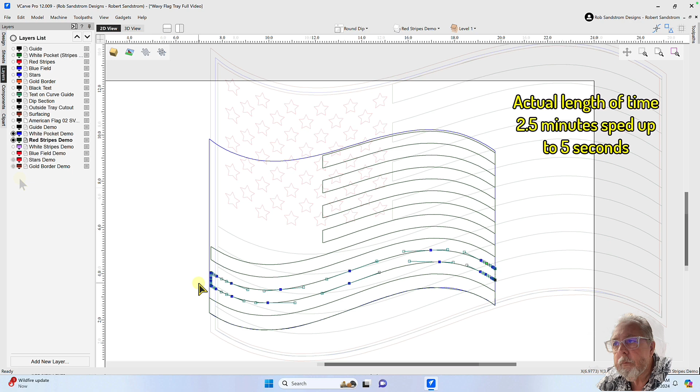Okay, at this point, we've got the full left side, we've got the bottom, we've got the full right side. The only thing we need to do now is pull up the red stripe on the top where the gold border will come down. Let me put the gold border on again. So you can see it's right on the edge. So now we pull this one up like we did the others.

Pull that one straight up. So now we've got the top of the stripe pulled up. Let's go ahead and put the gold border, just do a quick check. So when we do a quick check, we can see that the stripes are all within the gold border. So it'll be bounded. Now let's put up the blue field.

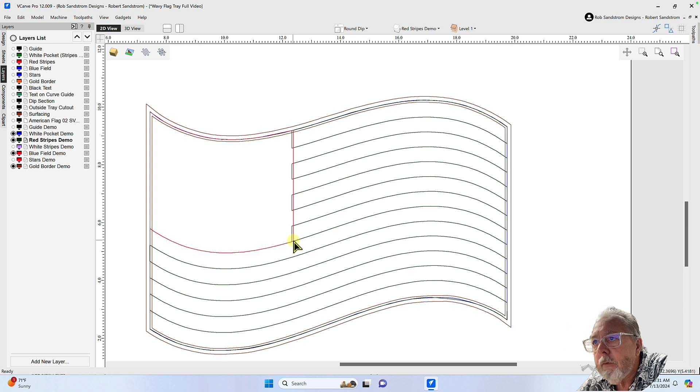We can see that the blue field, which will be the last thing I carve and pour, bounds the stripes here on the left side. And this is not a red stripe, this is a white stripe, so you're going right into the white epoxy, so no worries about overlap there. And we can see that the blue field overlaps the gold border and all the stripes overlap the gold border. And remember, there are really no white stripes because those are the first pour we're going to do.

So now when we look, if we turn on everything, we've got all of the overlaps perfectly assigned where we need them to be. And because of that, we can now start to lay out the tool path. So this is the most complicated part of the whole process of setting up your multi-layer epoxy for pouring. And let's do a quick review.

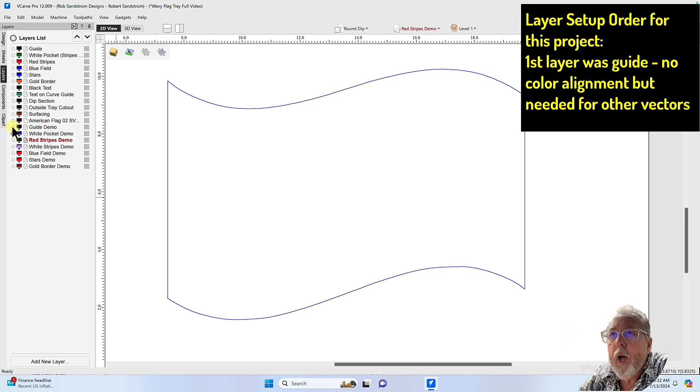The first thing I did was I took the original graphic and broke it into the vectors by the pours that I was going to make. And you'll see when I set up my tool path, that's the philosophy I'm using. The first one that I set up was the guide, and then I could work everything off of that. And once I had the guide set up, I set up the white pocket, which went 0.05 past the guide. Then after I had the guide set up, I set up the red stripes, and before I started worrying about overlap, I just got them onto their own vectors.

Then I took the white stripes from the graphic and put it on another layer, which I'm not going to use in this demo, but I'm going to keep it for later projects. And then I did the blue field. And on the blue field, I made it so that it would overlap into the top and on the left, but not on the bottom because it was right at the right size for the red stripe alignment. And remember, this is a white epoxy pour that will not be cut into other than for the blue and the red stripes. And then I set up the vectors for the stars,

and I also set up the gold border. And when I set up the gold border, I set it up off the guide so that at the end, this will be the last pour, and it will cut into the tops of the red, the tops of the blue, the left of the blue, the left of the red, the bottom of the red stripe, and the right of the red stripe. And it will perfectly bound everything and keep all the red stripes at the right size and the blue field at the right size. And we will have what we want.

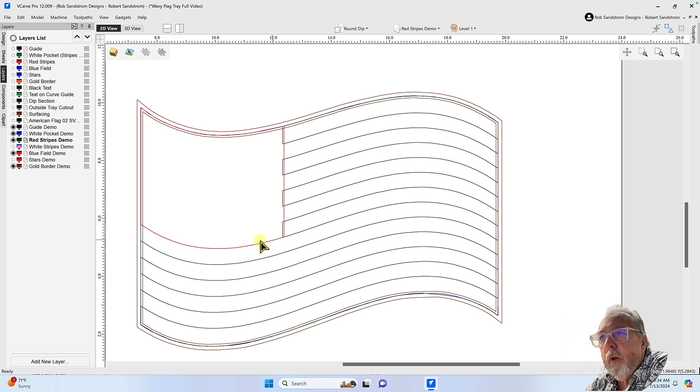I went back and I made sure that I turned on the blue field. I made sure that my blue field was overlapping here. And the stars really don't have any need for overlap because they're going to be left when I carve the blue field. They were poured white in the first pour, and they'll be left when I pour the blue field and I carve the blue field.

Now that we've gone through all the vector layers set up for the flag proper, the next thing to talk about is I had decided to add some text "In God We Trust" to my flag. And I want to show you how I did that simply using the Text on Curve tool. The next set of vectors I'm going to set up is the text. So I'm going to add a new layer, and that one's going to be Text Demo.

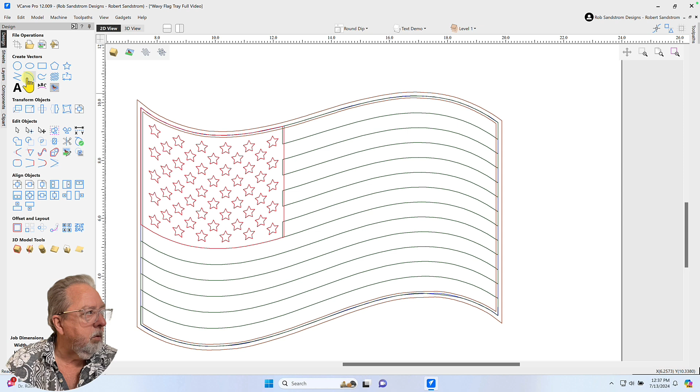And then I'm going to add one more new layer because I like to keep it simple. Text on Curve. Let me add Demo there. So now I've got two new layers, and I'm going to set up the text. So the text, I'm going to make that the highlight layer. I'm going to go to the text tool, and let me just put it up here on top right now. In God We Trust.

And I used the freshman font. I think I need to separate out these a little bit to make the epoxy. I'm not sure I did a good enough job there to my full satisfaction, but let's go ahead and separate in between. So I'm going to see if I can explode up here. If I get in between and I were to left click, those would go together. You can tell by the little symbol there showing them moving closer together.

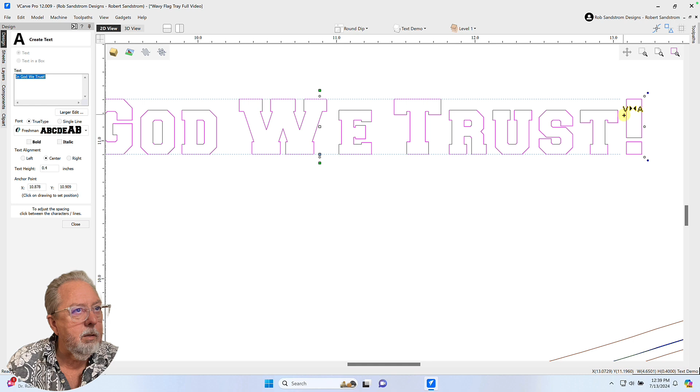Hit the shift key, then they move out. If I just hit it without the shift key, then they stay close. Just putting a little spacing between them. And I could have done the whole line at one time. Sometimes it's easier for me just to go through step by step. I'm holding the shift key as I select these. And if I didn't hold the shift key, then they would move together.

So I'm going to hit close. And if I need to, I'll adjust these at the end. So now hit close. Now I have the text right there. The next thing I need to do is put them where I want them. And I want them right here on what's going to be a white stripe. To do that, I need to have a nice open vector line that I can put it on.

So what I'm going to do is I'm going to take this line, this vector, which is a red stripe, and I'm going to copy it, not move, copy it as a layer to the text on curve demo right here. And what I did in the original one is I put it on that other vector that was up above that said text on curve.

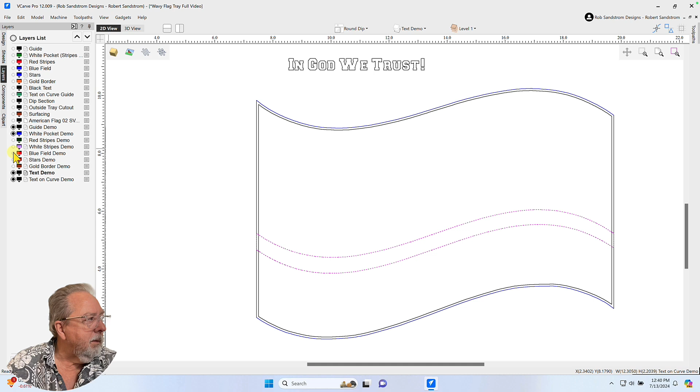And then what I need to do is I'm going to come over here to the layers real quickly, and I'm going to turn off the red stripes, blue field, stars, everything else, gold border, white, guide, everything that's going to interrupt me and get me confused.

I'm going to take this and I'm going to turn it into an open vector, select the node mode, and I'm going to come over here and I'm going to delete that span. I'm going to come over here and I'm going to delete this span. I'm going to go out of the node mode, select this vector, delete that vector. And now I have this guide right here.

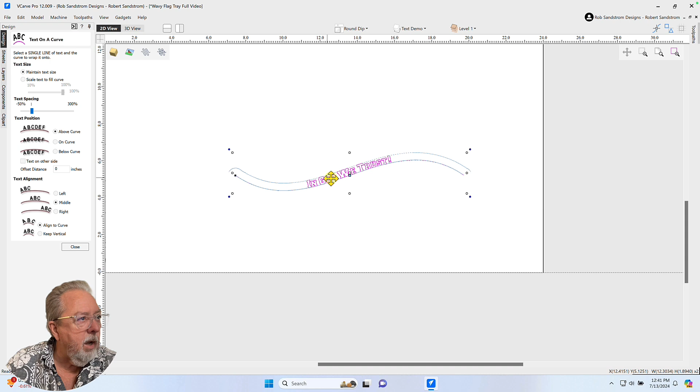And I can take the text and go over to the text on curve tool right here. I want it to go above the curve and I want it to be centered. So I select over here and you can now see that I've got In God We Trust following the red stripe. And let's see if it's got a good enough size.

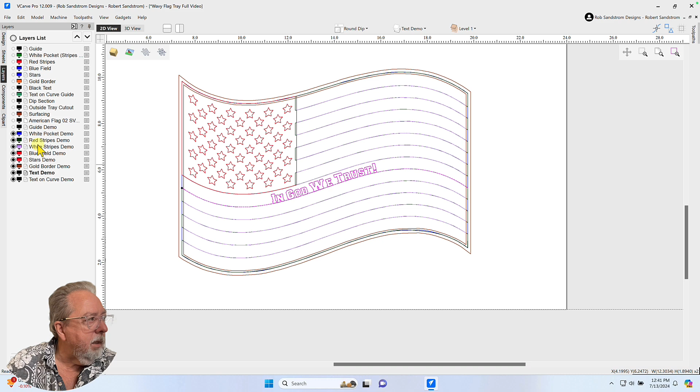So we'll go back and turn on the other vectors, particularly the red stripes. And you can see that it can be bounded right in the center there and be right on top of that stripe. So it's exactly where I need it. So now I have the text. Let's go turn on the other vectors. I don't need the guide. I don't need the flag. And this is my full flag that I want to do an epoxy pour on.

We just finished. I hope you found it helpful. I hope you were able to pick up some insights on how you might do your own epoxy inlay and feel comfortable to get out in the shop and try one. They're a lot of fun, and I'm sure you'll enjoy it if you get around to trying it. I only wanted to cover the process of doing the epoxy inlay layout because it was so detailed and took so long. By now, I imagine your eyes are glazing over because it's been so long. You probably took a break a couple times, at least I would have, but hopefully it was worth your effort and time. I'm hoping it was because I put a lot of effort into trying to do it for you.

The next video will go over how I took all those vector overlaps and all those layers and laid them out into specific tool paths, how I poured the epoxy, and how I put in a round over for the edge of the board and for the pocket, and how I carved the pocket, what finish I used and how I did that, and how I put my feet on.